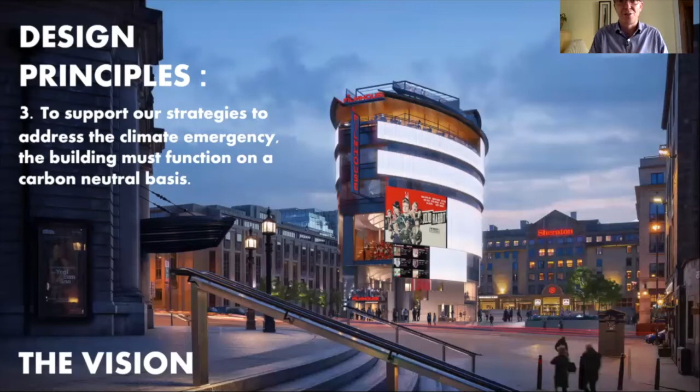And then the final bit is we're fully aware that we're taking up some public space - public space that, as we've just said, hasn't been used very well, but public space nonetheless. So obviously we want to make sure that our building works in that space.

We're proposing it's aligned with the front door of the Usher Hall, so that we've got an access point into the rest of the cultural quarter on Lothian Road. You've got the Lyceum, the Usher Hall, and the Traverse. And with the new Filmhouse building, you would have this strong sense that there was a greater festival square that went to the other side of the road.

We're also wanting to ensure that we use this building as a catalyst for developing new activity within the square. How can we ensure that it's used by as many people as possible? So we're in discussions with our neighbours, but also a range of other partners, about how we can make the square accessible for art, whether installation, performance, but also just for people to sit and enjoy the view.

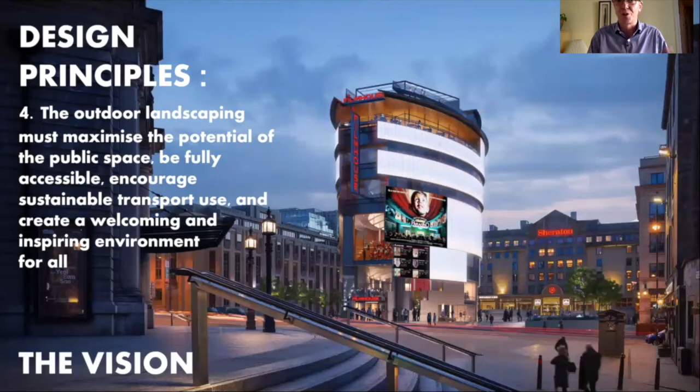Inevitably, as part of how we try and make the whole thing work, we'll be looking at how we can have tables and chairs and teas and coffees served outside on those nice days. But crucially, the square has to work for everyone.

What I'm now going to do is talk through some of the plans for where we've got to with our thinking, emphasizing all the way through this is a work in progress, and we're really wanting your comments on how you think this works for you.

So this first slide just demonstrates how we think that the square could be laid out, but this is, again, work in progress - looking at a mixture of soft landscaping, which is the green stuff, harder landscaping, and crucially, we're looking at how we can ensure that there is a clear path to the rear door of the Sheraton, as well as clear access and pathways to the existing office blocks.

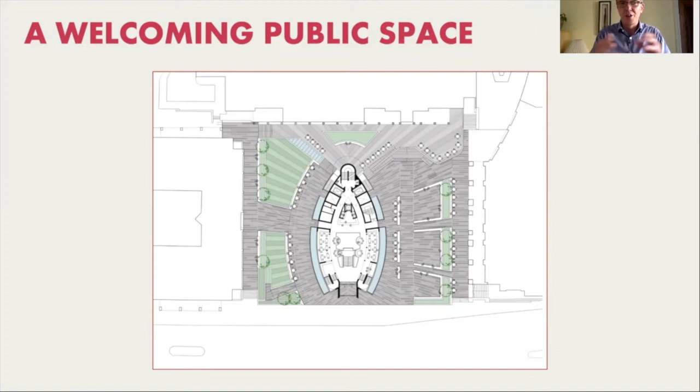But also making a feature of the fact that if you're looking overhead on the tower, you'll see it's an oculus shape. So this is our eye to the world, and how we can use that as a framing for the design on the square.

As you come into the building, in the middle of the screen there's the front doors. You'll come into a bright, open, airy space. There'll be some tables and chairs, but the box office will be there, toilets, lifts, staircases, and so on. So it's very much the central point that allows you then to fan out through the rest of the building.

You'll see the mezzanine level there, which is going to allow us potentially to have some additional cafe bar space, but will also be used as gallery space, so we can have displays of film-related content, as well as potentially working with some of our other partners in making sure that there's a display space and exhibition space in the centre of the city. And you'll also see that in the middle of the image there's a staircase, and that's the main staircase that will take you down to the cafe bar.

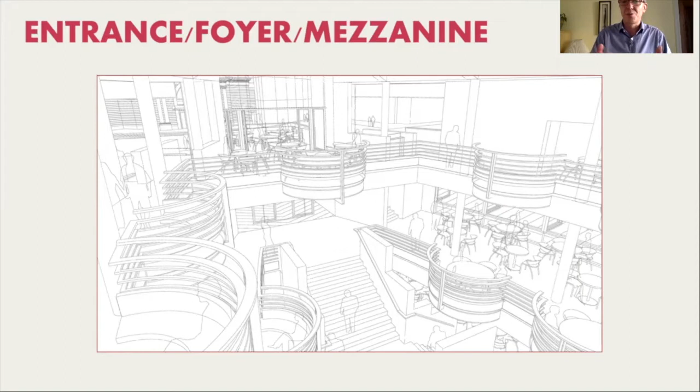As I go up and down the building, you'll see that they're highlighted in a sort of salmon pink colour where we are at any moment in time. So we've just been looking at the ground floor and the mezzanine, and then we're going to be going further down in just a second.

So potential layout is you're coming in, you've got the staircase, you've got the box office there. You'll see at the rear of the building, and this gets repeated inevitably on every level, is you've got core access points and core exit points. So there'll be 2 large passenger lifts, as well as a third lift that will be more programmable to allow access to upper levels and lower levels at key points of the day.

2 main fire escapes, including the rear one, which runs the full height of the building. You'll also notice that there's a pale blue around the edge of the building at the ground floor level, and that is a light well that's going to be taking daylight through to the lower 2 levels, which is the cafe bar and then the cinema concourse.

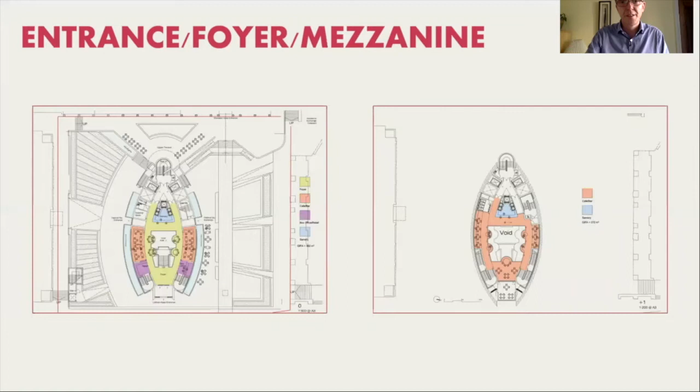So we're now going to go down to the cafe bar. Thing to point out is that's purely indicative seating arrangement - it won't be the way the seats are. It's just to show how many seats we might be able to get in.

Other key thing to note here is the green space at the top of the screen. This is one of 2 large education and learning spaces that we're developing for the building. One of the things we haven't been able to do with the existing building is have all the fantastic education work we're involved with on site.

Equally, there are a lot of other partner organisations like Screen Education Edinburgh, some of the other film festivals I was talking about, who'd love to do more work in this area, as well as national film education organisations, people like Screen Academy Scotland and Into Film, who would like this kind of space to be available. We currently can't provide that.

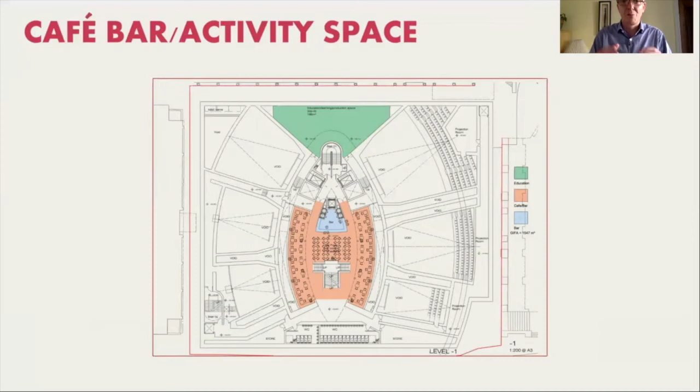This then becomes one of the key hub points for the whole building. And as I take you down to level -2, this takes you to the main cinema concourse.

Before I move to the cinemas, you'll see the second green area is at the front of the building, at the Lothian Road end, and this is the second education space. But the other spaces here are all cinemas.

You might be wondering why we need 6 cinema screens when we have 3, and a lot of the time they're not full. The nature of cinema is that we have a lot of screenings through the day, and it means that at a weekend, for example, Friday and Saturday evenings, the cinemas will be very, very busy. Wednesday lunchtime will be much quieter. So depending when you come to Filmhouse, you might get a sense of why do we need more seats when the existing seats are empty. It's dealing with the peak times and how we can ensure we can service more of the peak time.

Secondly, it's because with all the partners we work with, and want to work with more, they're very keen to show more films, often at the same time as we're trying to show films at Filmhouse. There has to be a compromise, and it's always a very good compromise between ourselves and our partners. But the problem is something has to give, and the thing that gives is the number of films we can show at any moment in time.

What we have here is a proposal also that we've got more varied spaces. Currently, Cinema 1 is 280 seats, Cinema 2 is 100, and Cinema 3 is 74 in the existing building. We're proposing a much more varied number of seats across the cinema screens here, which again makes it easier for us to work with our partners, as well as for ourselves to have a range of films in screen sizes that are appropriate to that film.

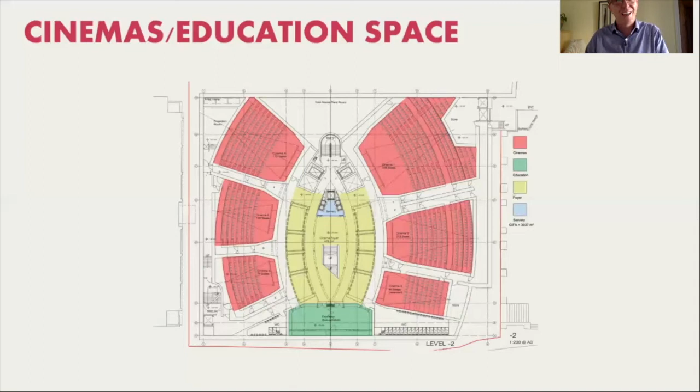As I go down to level -3, this is going down a long way, you'll see that we've got the bottom ends of the cinemas down to that level. This also means that each of the cinemas will also have access for disabled users at the front of the screens.

One of the things we've noted going around visiting other cinemas is it's very rarely the case that you've got easy access to the front of the screen for people who have mobility issues in wheelchairs and so on. We're also aware that an awful lot of people who might make films might have mobility issues, and you have a bizarre situation where somebody might be trying to introduce a film but can't because they can't physically get to the front of the screen. We're dealing with that through this approach, and it therefore means that at all levels for the cinemas, each level is fully accessible for anybody.

The point I didn't highlight earlier is that the projection boxes also can be accessed by anyone, whatever their mobility constraints. That also is quite unusual, because even in very modern cinemas, on the whole, projection boxes are up a flight of steps.

The blue area in the middle are the kitchens. Kitchens and storage take up a lot of space. We're looking at servicing probably about twice as much in terms of food and beverage operations through the whole building, and this is well over twice the amount of space - in fact, probably about 3 times the amount we currently have. It means we'll be able to offer a range of food and drink throughout the entire building, depending on what people want or need at a certain moment in time.

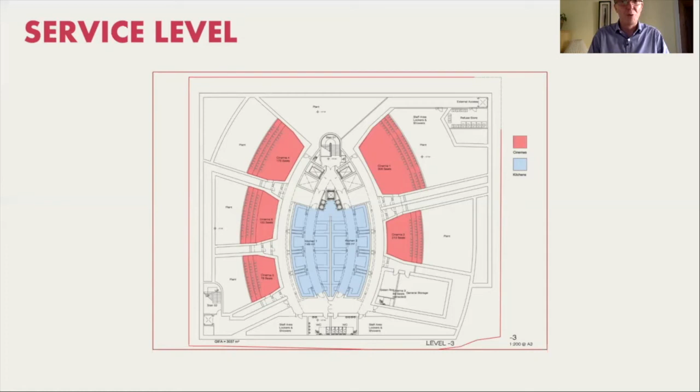I'm now going to go up into the middle of the building. This is the level above the entrance foyer, and this is our festival centre. The festival centre is primarily for film festivals - yes, Edinburgh International Film Festival, that's part of who we are, but it's also for all the other film festivals we work with, over 20 each year, and we'd love to have more. One key thing they want is to do conferences, events, seminars, workshops, masterclasses, special screenings and so on, and there isn't a space for that in the existing Filmhouse building. This will provide that space for us and our partners.

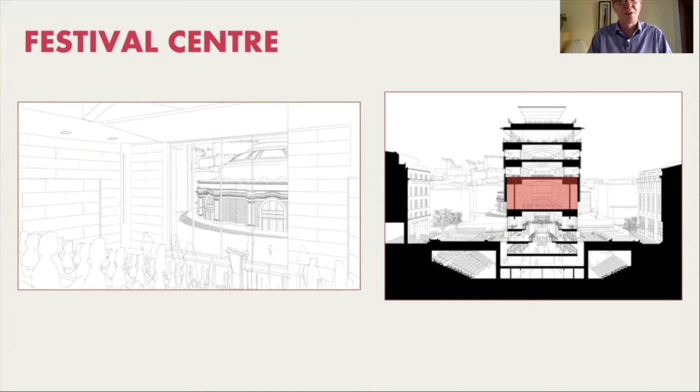As you can see, the intention is it will have a large window looking out over the Usher Hall up to the castle. So in itself it becomes an iconic space for people to visit and experience, as well as be inspired by whatever is being discussed at the time.

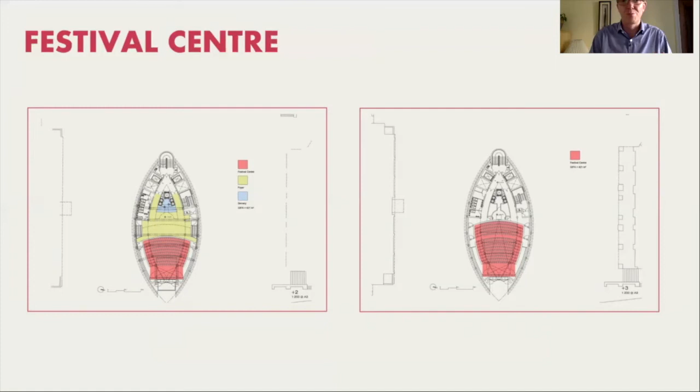What we're looking at is a combination of fixed seating and retractable seating. It will be an auditorium with up to about 200 seats, and then there'll be an additional flat floor space behind it that will allow us to do more traditional workshops and events like that.

We're then going further up the building to 2 floors of offices. You might wonder why on earth we need 2 floors of offices. Well, as Filmhouse we don't, but as Filmhouse and Film Festival we need about 1 and 1/3 of these floors at peak times. We ratchet up, we employ a lot of temporary staff in the lead up to the film festival each year, and we don't have enough space to house everyone at the moment, so we're always having to rent additional spaces and cram people into inadequate spaces.

This provides enough space for us. But secondly, this is where the building isn't just about showing film, or indeed learning about film - this is about making. This is about the curation of film and making films from the production side.

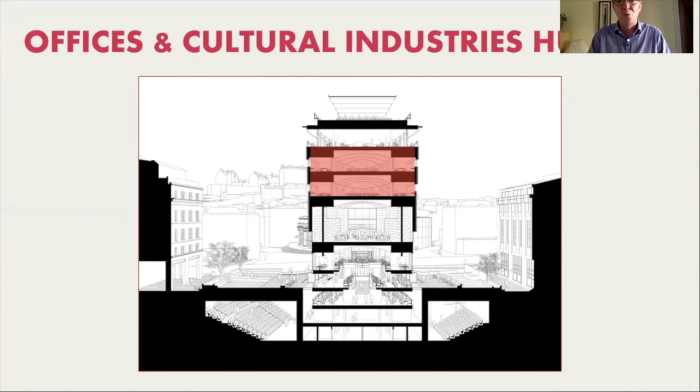What we're looking for is this big building becomes a hub for the whole of the film and screen industries. There'll be space here available for, whether it's a production company, film festivals, film education organisations, to rent short-term and long-term, all contributing to the sense that this building is a community of film. So whoever you bump into - a filmmaker, someone working in the organisation itself, someone behind the cafe bar, someone visiting - you will all have a connection to film.

And then the last 2 levels, we've got an upper level restaurant. One of the things we have with Filmhouse at the moment is we've got fantastic chefs, fantastic food offering, and a quite inadequate physical space to serve it in. We've seen repeatedly great demand from people to have a nice eating environment, and we really struggle to provide that. So what we're proposing here is a way of separating the two.

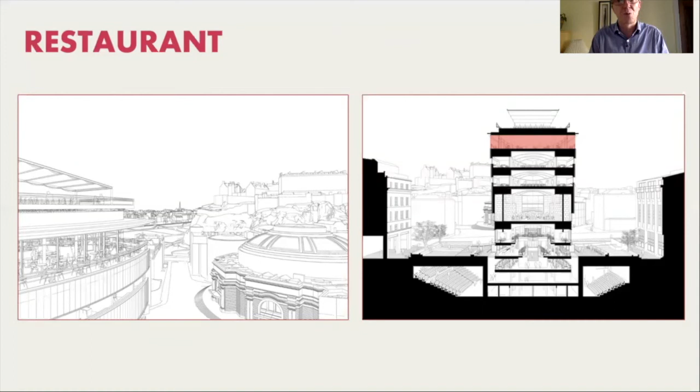So we have the cafe bar at level -1, and we then have the restaurant at this upper level. It means we can utilize the profits generated from the restaurant to underpin the cultural activity we're wanting to do in the rest of the building. And then lastly, this is a rooftop event space - a mixture of bar, cinema screen, but also just public access.

The views from here will be amazing, and we're really keen to make this as accessible as it can be for free, so you don't have to buy a drink or a cup of coffee at key points through the day and through the week. But equally, it's a space that we really want to utilize as an interesting space.

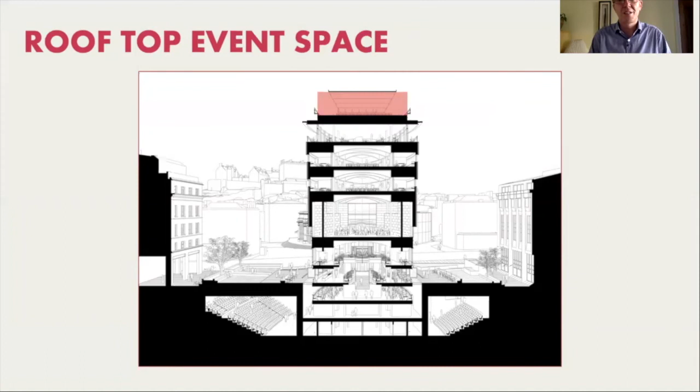For example, through film festivals and other festivals we host, there's always a need for reception spaces. This can be a reception space. It will have a canopy over it, so you don't have to worry quite as much about the somewhat unpredictable Scottish weather. But we're also looking at what else we can use the space for, and how far we can have regular screening events there and other events designed to be accessible to as wide a range of people as possible.

So that's a bit about who we are at the moment and where we're trying to get to. You might ask the question, why don't we just fix the existing building? Well, the existing building, as I said earlier, is a converted church with lots of add-on buildings in between times.

One simple example I can give is around toilets. We don't have enough toilets, and the toilets we do have are very cramped. Because of the physical footprint constraints of the existing building, the only way we could increase the number and space for toilets is by eating into other space. So we could provide really nice toilets at level 1 in the existing Filmhouse, off the two doors of Cinema 1, but the only space we can go to is eating into the cinema space.

The only space we can go to on the ground floor level is into the foyer space or the cafe bar space. And by eating into the foyer space, the corridor space, and the cafe bar space, in all these situations we still need a corridor. And one of the parts of the business that generates enough revenue to subsidize the cultural offering is the cafe bar, so why would we want to have less space in the cafe bar?

And the example in Cinema 1, both from increasing the size of the toilets and re-raking the seats to make them more comfortable, with proper legroom and proper bottom room, we would reduce the capacity from about 280 seats down to about 170 if we kept the toilets as they are, and down to about 150 if we increase the size of the toilets. So we're heading towards half the capacity of the existing screen just to make the seats and toilets more comfortable.